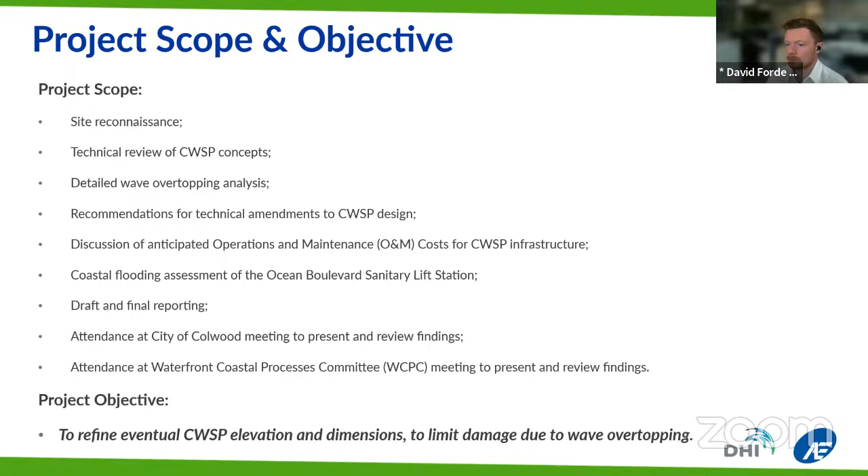So the wave overtopping analysis consisted of these 7 steps. So we did our technical review of the waterfront stewardship plan concept. That was the original report and conceptual drawings produced by Paul de Grief and presented to the city previously. Then we looked at what were the environmental drivers influencing resulting overtopping. We then took cross sections through the shoreline, Colwood shoreline, and fancy name for that is just transects, coastal transects through the shoreline. We then characterized each shoreline or each transect in terms of whether it was nice, gently sloping beach or whether it was a rocky foreshore, as an example.

We then estimated existing overtopping rates, so how much wave overtopping is experienced by Colwood's waterfront at present. And then we determined future crest elevation, so future shoreline elevations, so that wave overtopping would be limited to safe limits to limit any potential damage or public safety concerns. And then finally, we made recommendations for technical amendments to the waterfront stewardship plan.

In terms of the technical review, we kept to the same terminology and geographic breakdown of the original Waterfront Stewardship Plan. So in Coburg North, right at the very tip of Coburg Peninsula, the DND property future is unknown, I think, still at present. I believe there's a plan to revert that, or if it hasn't been done already, revert it into the city's hands. There is a spatial constraint for dune restoration expansion at the north end. The Riflery berm crossing area, there's a similar spatial constraint. And at South Beach, there is no major concerns.

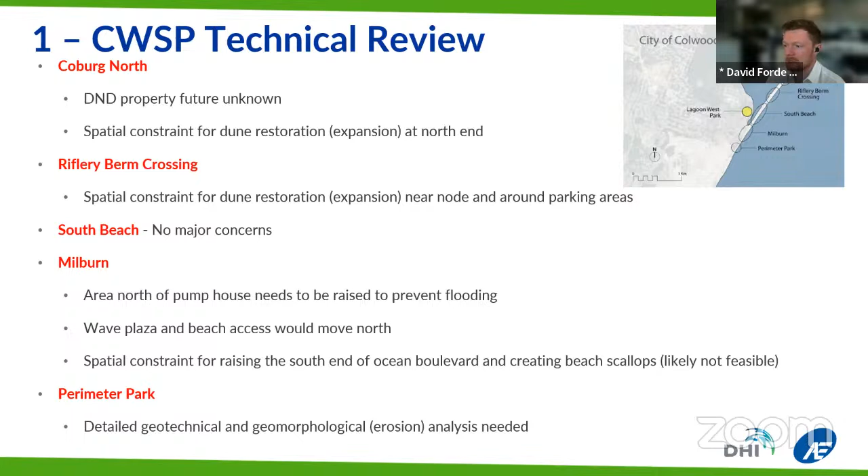So getting a little bit into the weeds, a little bit more on the technical side, we assigned a design life for the Waterfront Stewardship Plan of 50 years. And that was assigned in concert with communications with city staff. It was determined that an appropriate design event, so the level of service, let's say, would be a 100-year or 1% AEP storm, which leads to an encounter probability of 39%. So essentially, there's a 39% chance of that event being encountered during the design life of the works.

And the graph or the chart at the bottom is just a fancy way of representing how a specific return period interacts with the design life of any intended works. So the further you move out in terms of return period, so let's say a 200-year event, obviously the chances of it occurring in the short term are very low. But as you move towards the extreme right of this table, the odds of encountering it increase.

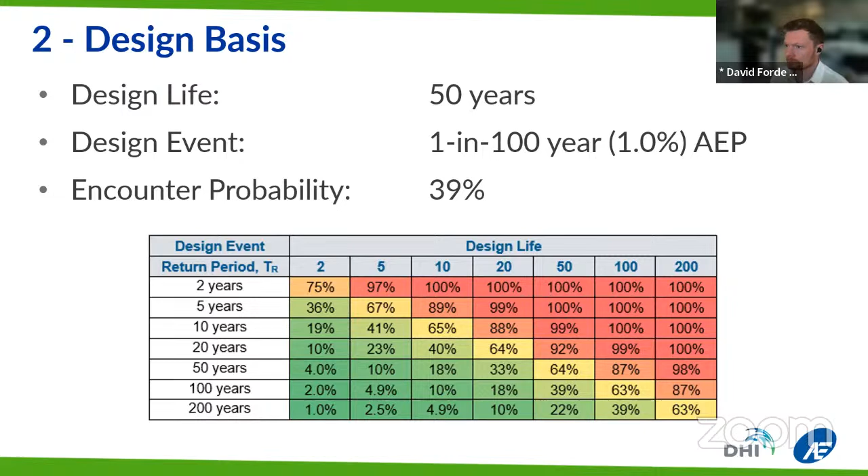Water levels and waves came from an existing study that AE and DHI completed a couple of years previously for the entire capital region, and just colloquially known as the CRD study. And that work encompassed the city of Colwood, but also all the municipalities and electoral areas and regional districts within the capital region, as well as participating First Nations. And the design tide level, still water level plus surge, was 1.99 meters geodetic to CGVD 2013. So that's for the 100-year still water level or 100-year blue water flood level.

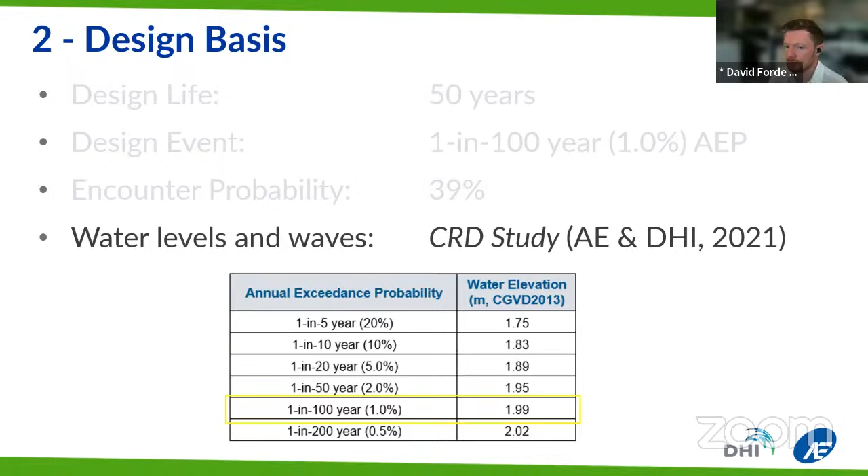And then we applied a sea level rise factor on top of that, or a sea level rise adjustment. And they came from recently published Natural Resources Canada projections. And in this graph, it's basically the solid black line that we've used, which is the median, the RCP 8.5 median value. The blue line is actually the old provincial guidelines, or the existing provincial guidelines.

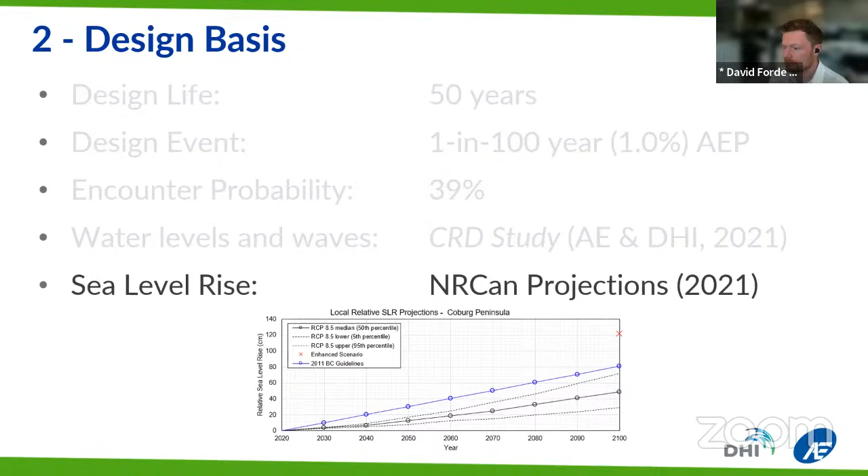Step 3 then was we divided the shoreline up into 17 transects, or 17 cross sections. And those sections were chosen as indicative examples of surrounding shoreline and beach areas. And then we had our wave modeling from our previous 2021 study.

And at each transect, we exported the wave modeling results. And that's basically a significant wave height value. It's basically a wave height for our design event that then gets applied to the shoreline, to the cross section, and we're able to calculate the resulting wave overtopping rate for that event.

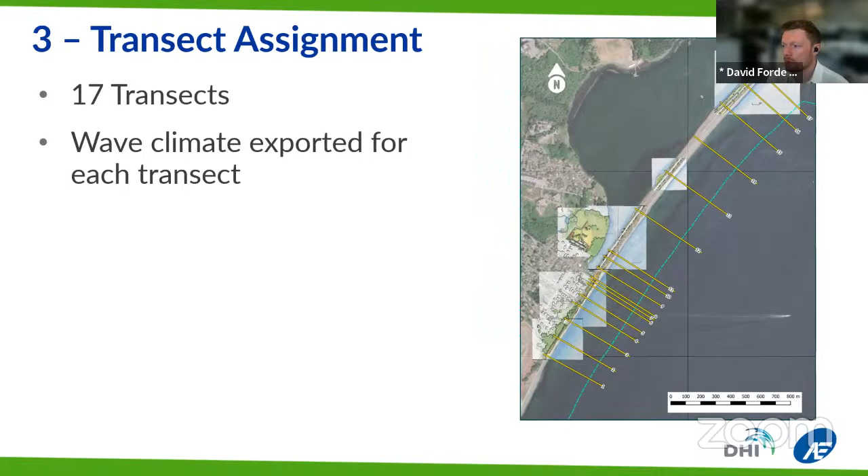We then took a look at each cross section, and we produced sketches at each cross section, at each transect, and we cross-referenced those against the existing Waterfront Stewardship Plan drawings, and we had a look with respect to what structures were being proposed. So in our reporting, you'll see these big 11 by 17 sheets in the appendices that break down each transect and where they sit and what's being proposed with regard to the Waterfront Stewardship Plan.

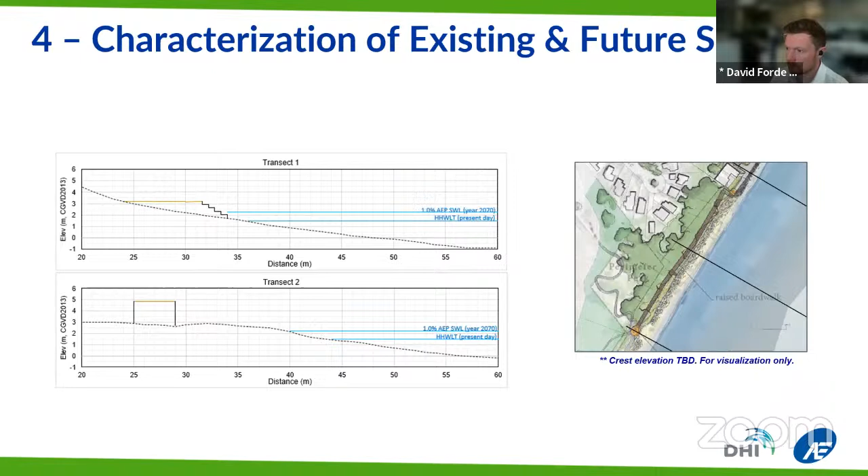So once you run the math and once you run the formulae for the design event, which is a 100-year storm occurring with a 50-year design life, as well as a sea level rise being applied. The rates shown here actually are for no sea level rise. The existing shoreline, you can see that we're getting significant wave overtopping in some areas on Colwood Peninsula.

And how those wave overtopping rates are defined, there's a publication called Eurotop, which is an industry standard reference material with respect to safe wave overtopping rates for various purposes. So for example, if the peninsula was being trafficked, then driving at low speed, the second entry in that table, we would be trying to limit mean wave overtopping to 10 to 50 liters per meter per second. But you can see that many of the instances on the table on the left exceed that number.

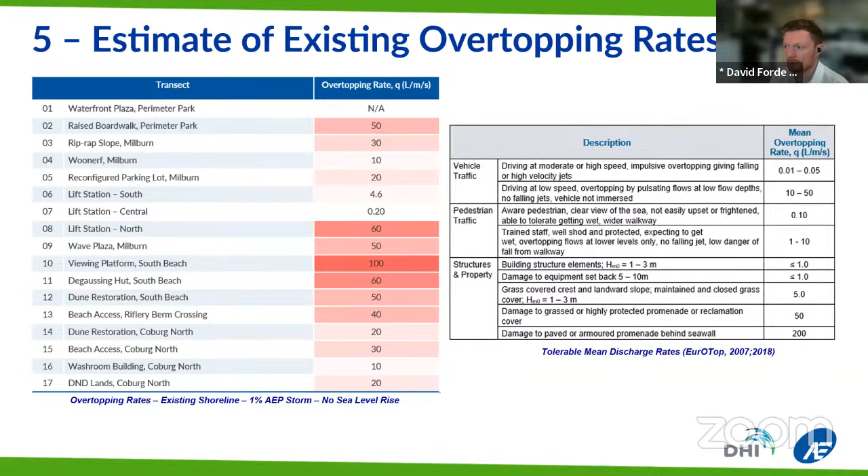With regard to damage to structures and property, we want to keep overtopping rates much lower, in some instances as low as 1 liter per second per meter or less. So we had basically a picture of what happens right now with respect to existing elevations, existing shoreline slope and profile. And then we had communications with the city to decide what were appropriate limits to set as standards for the design of the Waterfront Stewardship Plan. So we landed on rates as shown on this particular table.

So we said anywhere where there would be very sensitive infrastructure, we would limit it to 1 liter per meter per second. So that's affecting the sanitary lift station. In any area where there would be pedestrians present, but it would be difficult to close off, we said that it would be 10 liters per meter per second. We understand that under existing storm event conditions, the city is able to close off or isolate areas of Colwood Peninsula. So the likelihood of members of the public being in vulnerable areas during storm events is low.

And then in other areas where more wave overtopping could be tolerated, where the entirety of Colwood Peninsula could potentially be closed off. So up at the north end, we said that a higher wave overtopping limit could be tolerated. That's the 20 liters per meter per second. And all of those values, again, come from the Eurotop manual, which is the industry standard with regard to wave overtopping analysis.

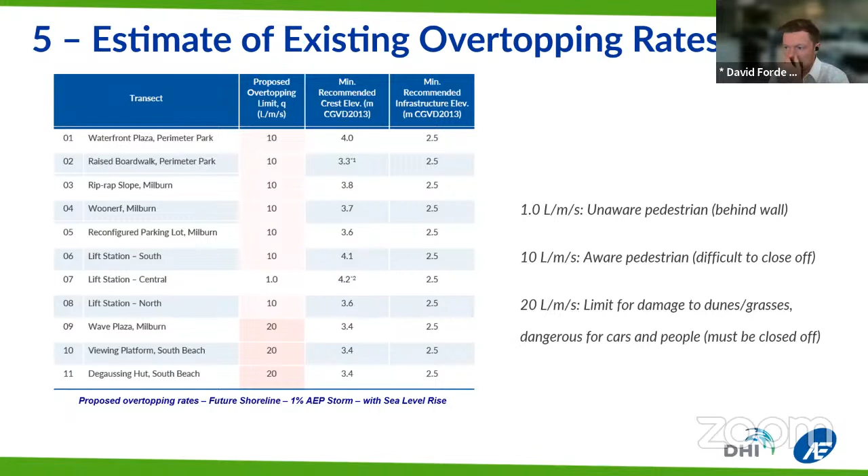So some of the limitations of the approach, I'm sure you have the slides and it's contained within the report, but a couple of the big limitations would be that this is for coastal storms only. It does not take into account any overtopping or performance when subjected to tsunami flooding. It doesn't take into account any mobilization of logs. And I know that that can be an issue during a lot of storm events, but it's very hard to quantify.

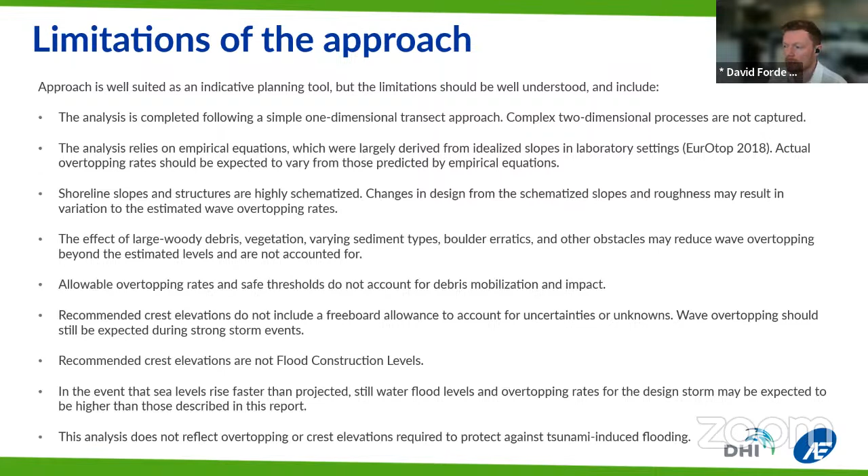Again, shoreline slopes and structures are highly schematized. So the analysis is a good surrogate, but obviously at very site-specific locations, the results may deviate somewhat. And the recommended crest elevations are not flood construction levels as defined by the BC provincial guidelines and the flood hazard land use management guidelines. So they're not meant to inform habitable structures or structures of any kind.

So basically this is the end product of the analysis. So we're determining the future crest elevation, and ultimately that leads to shifting the design elevation and position of the multi-use trail, as well as the other Waterfront Stewardship Plan infrastructure elements to accommodate that wave overtopping limit.

If we don't shift the position of the proposed Waterfront Stewardship Plan infrastructure, then it will lead to increased wave overtopping over the lifetime of the project, and it will lead to damage of any constructed elements, leading to higher and more frequent O&M costs, and will lead to higher exposure of members of the public who may be there during storm events inadvertently, and also any city staff or emergency staff that would be out there monitoring the peninsula during storm events.

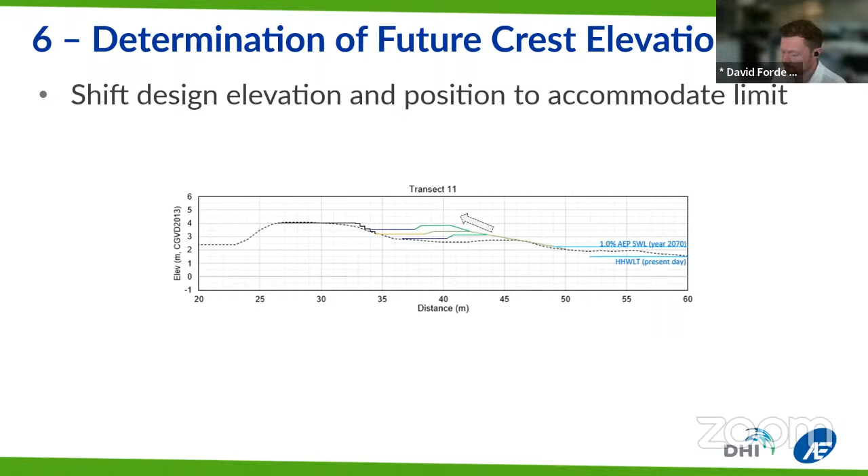The next couple of slides are just very specific recommendations for amendments to the Waterfront Stewardship Plan. It's a lot of text, a lot of information, and again, I would refer you guys to have a read of the report, kind of digest it properly, as well as have a look at the accompanying graphics in those 11 by 17 appendices. But we'll go through a couple of them.

With regard to the very southern end of the proposed Waterfront Stewardship Plan project, there's a waterfront plaza and a raised boardwalk proposed in Perimeter Park. Essentially, we would be proposing that that waterfront node be shifted inland, because we would prefer to reduce the plaza elevation and the material fill requirements.

As well as that, we would be proposing that additional studies need to be done. So that's the geomorphological assessment, as well as geotechnical assessment for stability of the slope and the potential for any scouring and wave impact loading to the boardwalk as a result of exposure to waves and their impact. That has not been done at this point due to the conceptual nature of the project.

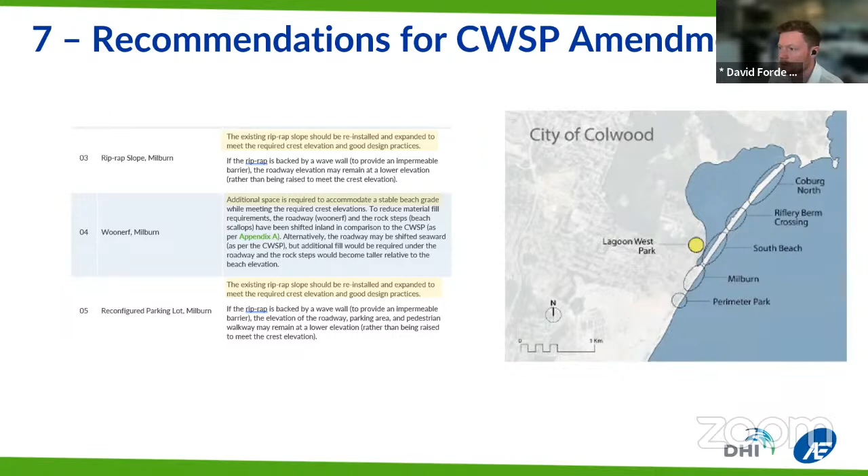Similarly, to accommodate the Woonerf, you will need additional space to essentially provide a stable beach grade to make that beach profile shallower and to reduce wave overtopping and wave erosion potential.

With regard to the lift station, there is an appendix in our accompanying report that looks at the long-term viability and feasibility of the sanitary lift station. Generally, our findings were that at present it looks like the lift station is safe behind the informal riprap protection and lock block wall that was completed in the last couple of years. But the city should adopt an adaptive management and monitoring approach to keep an eye and see how things go and revisit that analysis every few years as our understanding of sea level rise and its rate of increase deepens in the next couple of years.

The wave plaza would preferably be moved northwards. The reason for that is that the existing ground there is quite low, actually lower than blue water flooding, which is the potential still water level. So that's just the extreme tide plus a storm surge. And that could actually lead to water inundating the wave plaza and moving southwest towards the lift station and essentially creating an island of the lift station. So ideally that ground would be raised slightly to be above the still water level elevation to cut that route off.

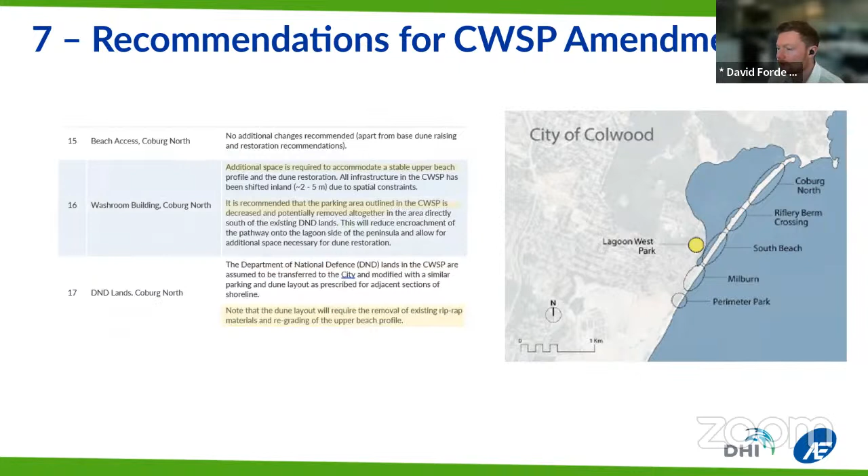The primary takeaway for the rest of the peninsula is that additional space is required to accommodate a stable upper beach. So essentially everything needs to move slightly inland, and the proposed dune restoration would need an increased elevation, not much more, but higher than what's there at present to meet that safe wave overtopping threshold limits. And finally, at the DND lands, the dune layout will require the removal of the existing riprap material that sits there and regrading of the upper beach profile.

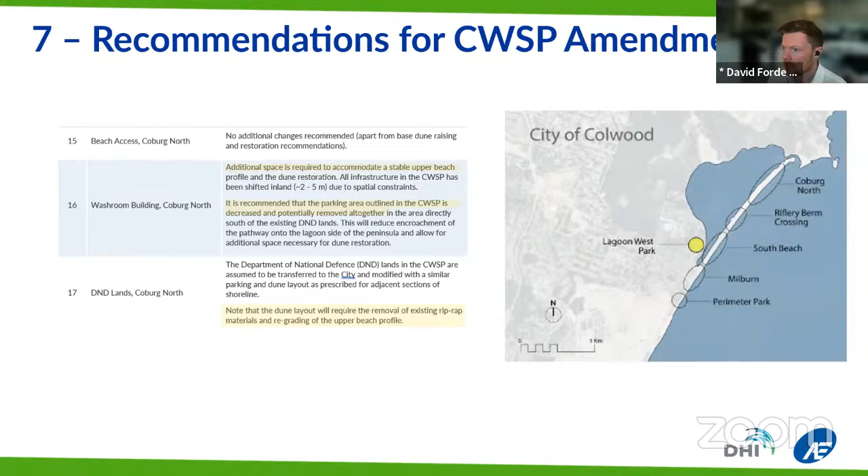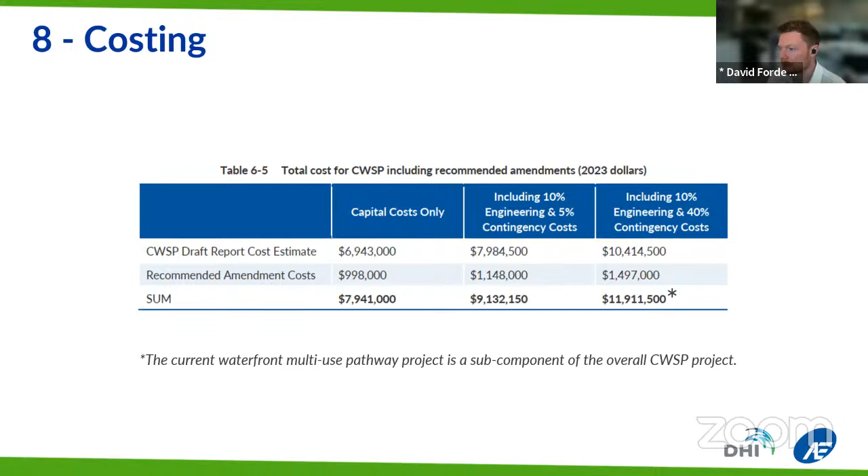So with that, thank you, and pass it over for any questions. Thank you for that presentation, David. Certainly a lot of information in those reports and in the draft. So this is an excellent opportunity for the committee to ask any questions for clarity. So I'd like to open the table now for questions, if you have any.

David, in this report, they refer to working around and changing the blocks in front of the sewage lift station, taking one layer off and moving them elsewhere. And they're talking about moving things south where that berm is. My question is that I'm under the impression that that berm to the south has got Aboriginal remains. And I don't think we can touch it, but correct me if I'm wrong, but I don't know how we can do that.

Secondly, I don't know, maybe I'm jumping to conclusions here, but the actual lift station itself, I know it's got a longer lifespan, but there's issues with that from an operational point of view that I have concerns with, and that is the air intakes that are on the seaward side, and the diesel exhaust is on the seaward side. Coming from that background, it's the wrong place for an air intake in case a wave comes through. There's ways you can mitigate that, but it's wide open.